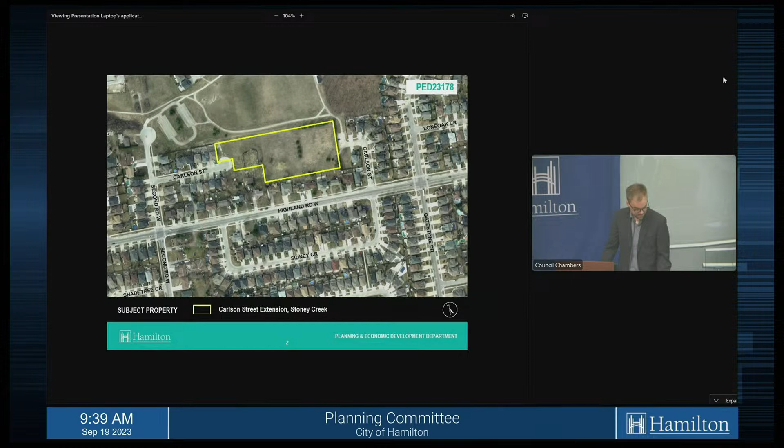The subject lands are designated Neighborhoods on Schedule E1 of the City of Hamilton's Urban Official Plan, and are located within the West Mountain Heritage Green Secondary Plan, which designates the lands Low-Density Residential 2B. This designation allows single-detached, semi-detached, and duplex dwellings at a maximum density of 29 units per net residential hectare. The lands are currently zoned both Neighborhood Development ND Zone, which allows existing uses.

A modified Single Residential R422 zone permits detached dwellings, both of which are under Stoney Creek Zoning Bylaw Number 3692-92. The applicant is proposing to rezone the entire site to a modified Low-Density Residential R1 under City of Hamilton Zoning Bylaw Number 05-200, with several site-specific modifications summarized in Appendix C of staff's report, including a reduction in minimum lot area and reductions to the front, interior, and rear setbacks, all based on the existing modifications in the R4-22 zone.

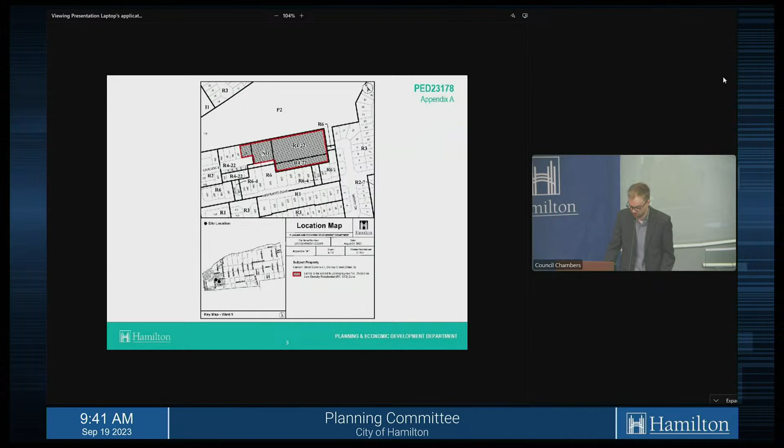Staff are also recommending that street townhouses be removed as a permitted use within the site-specific zoning bylaw, as street townhouses are not allowed in the secondary plan for these lands.

The applicant is also proposing a draft plan of subdivision to extend Carlson Street so it makes a complete connection from east to west. To the north of the proposed extension, the applicant is proposing 14 lots and 2 development blocks for single detached dwellings. To the south of Carlson Street, the applicant is proposing 7 lots for semi-detached dwellings, totaling 14 units to the south.

In order to make this full extension, the road would have to cross this portion of land, currently owned by the city. By extending the road across these lands, it would be severing this property. The proposal is that the lands to the north, currently used as parking for residents to enter Maplewood Park, would have that use maintained, while the lands to the south could be developed for residential purposes.

Through the recommended draft plan of subdivision conditions, staff are recommending that the applicant be responsible for 100% of the costs in the construction of the extension of Carlson Street, including all underground services and sidewalk, as well as requiring the applicant to put a service connection to the city-owned lands to the south.

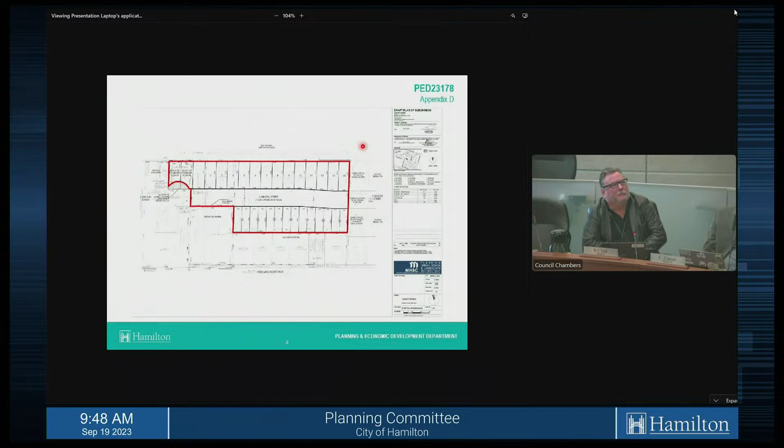Can I ask, Charlie, I can't see the page numbers on this. I'm looking at the one that shows the 7 singles and semi-detached, which is 14 semis. That there, perfect, okay. So the ones to the top of the screen, just to get my bearings, that would be the park? Through the chair, the 14 lots and the 2 blocks would be single detached dwellings, but just beyond that is Maplewood Park here, yes. Thank you very much.

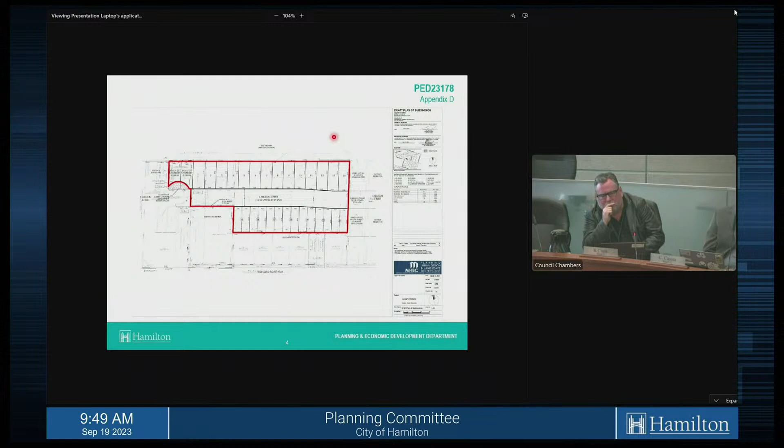And this proposal, if I heard you correctly, you said that it was compliant with the secondary plan and the zoning? Through the chair, the proposal does conform with the secondary plan. However, the zoning is zoned both R422 and neighborhood development, ND, and the neighborhood development zone doesn't allow any new uses. So the applicant did have to submit a zoning bylaw amendment to change the zoning of these lands. But while they also did that, they also updated the R4 zone under the old Stoney Creek zoning bylaw to bring it into 05200, our new zoning bylaw.

Thank you, Chair. And to be clear, what is being proposed here would be classified as low density? Through the chair, that is correct.

In the conditions, it indicates that the developer will be responsible for removing waste until the road is handed over. It didn't address snow clearing. So should we be adding that? The only reason I'm asking is because I've had issues with developments where they're not clearing the snow, the residents think it's the city's responsibility, but we have not assumed the road yet, so we don't do that, and it's on the developer's dime. So can I just get clarification? Will that be the same intent here? And if it is, should we be including it somewhere?

Through the chair, I'd like to direct that question to growth management staff. I've had the same issue, so it's a good question.

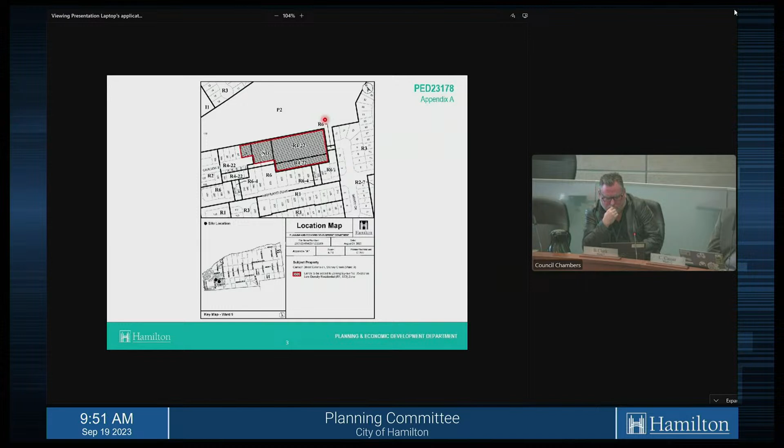Ashraf Hanna, Director of Growth Management and Chief Development Engineer. One of the standard requirements for developments is for the developer to make arrangements through growth management with Public Works to clear snow once they meet the requirements. They need to ensure that the road is ready for snow clearance, and once that's done, there's inspection being done, and then the clearance takes place for Public Works to start snow clearing.

To clarify, Chair, where is that stated? It's part of the construction process. I'm not sure I really understand that process. Staff are just conferring, thank you.

Through you, Mr. Chair, Binu Korah, Director of Development Engineering, to the councillor. As part of the assumption process, the city will actually make sure once the developer completes the construction, and once we accept the road, it is the responsibility of the city to clear the snow, and that arrangement will be made between our assumption section and Public Works.

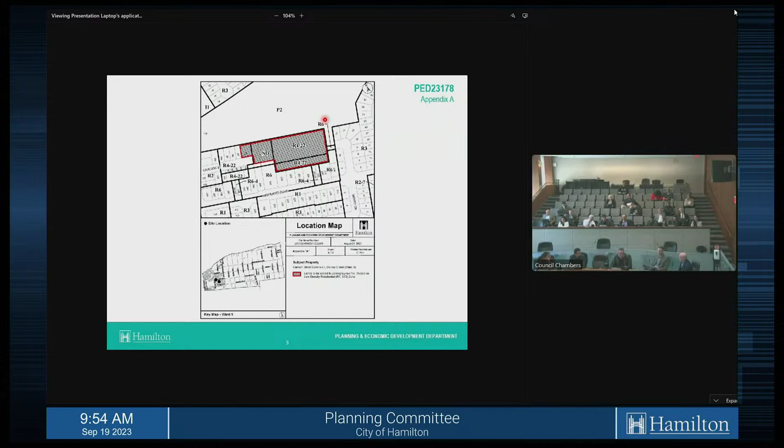I've had some residents raise concerns about the volume of traffic that will be created by these homes. Can you indicate to me, I read in one of the pages that they're not going to have garages in all of the units. Did I read that correctly?

Through the chair, we haven't received detailed building elevations for the final buildings. However, the zoning bylaw — it's our understanding that each unit would have a garage, and that garage would have to be set back 6 meters from the front property line in order to have enough room to park a vehicle. But at this point we have not received individual building drawings for each of the sites.

So each unit, semi-detached as well as single residential, will have a garage, is what you're saying? Through the chair, that would be at the discretion of the builder and the final home buyer. The zoning bylaw does require a minimum of 1 parking space per dwelling, and understanding the area, and that the developer had completed homes on Carlson Street that all had garages, that would be my expectation. Thank you, I appreciate that, Charlie, sincerely.

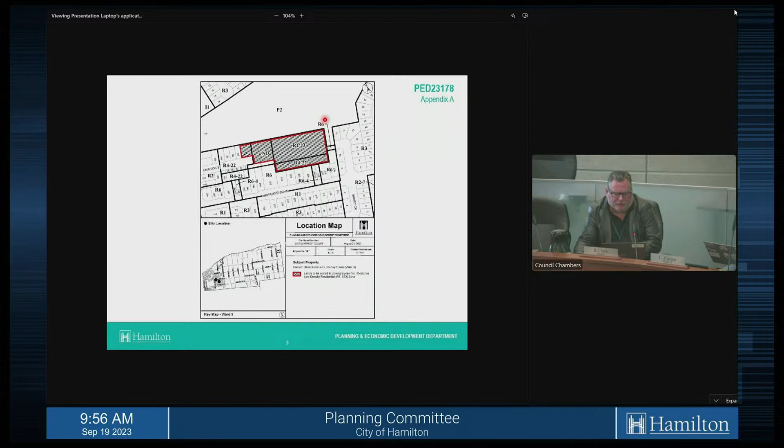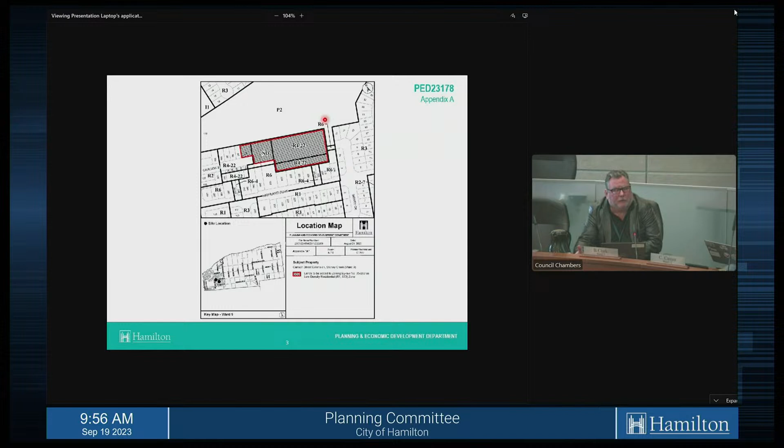The other item pushed back in a petition received today was the volume of traffic going up and down the streets. So we're looking at not a huge increase in housing on that street. So I'm struggling to understand the concern about an increase in traffic.

So you don't have a map there, but Carlson curves up towards Highland Road and then goes straight across to Second Road, which comes back up to Highland. So there are 2 entrances and exits from this development, correct? Through the chair, that is correct.

Thank you. And the other things added in this complaint were issues about drug dealing and things like that occurring in the park. We had that corrected by having a gate installed and closing that park in the evenings, and that resolved that issue completely. Those are all my questions, pending any further questions from my colleagues around the table.

I do appreciate the latitude of asking the questions today. Thank you, Chair. Thank you, Councillor.

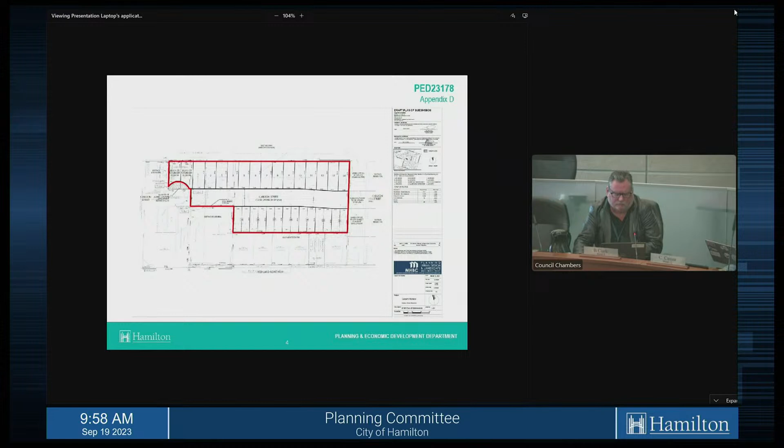Seeing no further speakers on the speakers list, I need a mover and a seconder to receive the staff presentation. Moved by Councillor Wang, seconded by Councillor Francis. All in favor or opposed? Carries unanimously. Thank you. Stephanie Murdich with MHBC Planning is in attendance.

And Stephanie's just making her way to the podium.

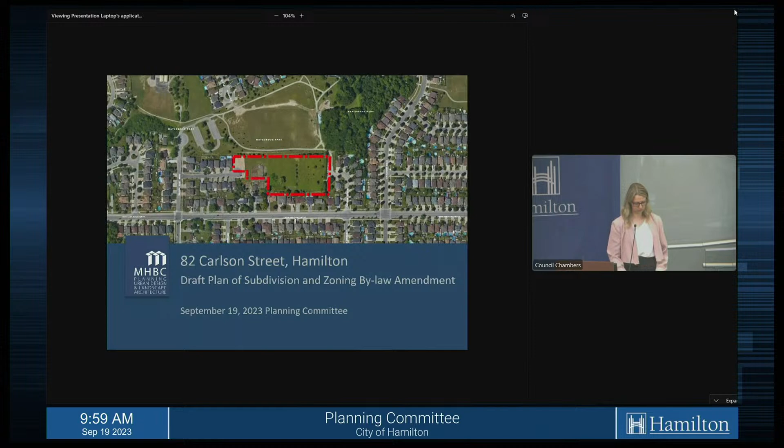Good morning, members of council, members of the public, and staff. My name is Stephanie Murdich, and I'm a planner with MHBC Planning here on behalf of the landowner this morning for the draft plan and zoning application at 82 Carlson Street. Thank you, Charlie, for the detailed presentation. I will be brief and try to clarify some of the questions and items that have come up this morning throughout my presentation.

Overall, the subject lands, as Charlie noted, have 2 points of access, so I just wanted to clarify that — one from the east and one from the west. The proposal includes the extension of Carlson Street as a public road, and I'll have some plans that show that in a moment. The lands are currently vacant and within an established low-rise residential community with a mix of single detached and semi-detached dwellings.

So just some background on the application. The pre-consultation meeting was held in November of 2021, and a formal zoning bylaw amendment and subdivision was submitted in September of 2022. We did have a virtual neighborhood meeting where only one member of the public attended in late 2022, and we received one written comment as part of the application as well. We received feedback from staff and technical agencies, and we prepared a fulsome resubmission, which was submitted in May of 2023.

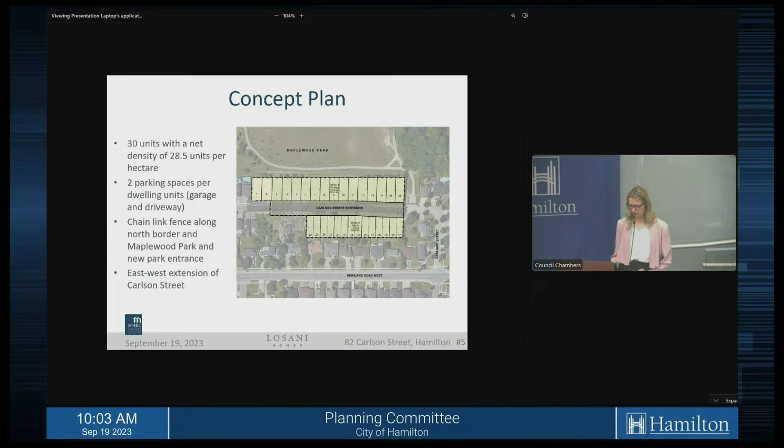So again, this is the draft plan of subdivision. Just a couple points of clarification on this as well. The 2 future development blocks shown on the far west side are currently located adjacent to the existing Carlson Street cul-de-sac, which is proposed to be eventually sold and added to those lands, but that will not happen until Carlson Street is constructed. A public road is proposed as well as a sidewalk on the north side, so that will also ensure the consistency of the pedestrian network in the subdivision.

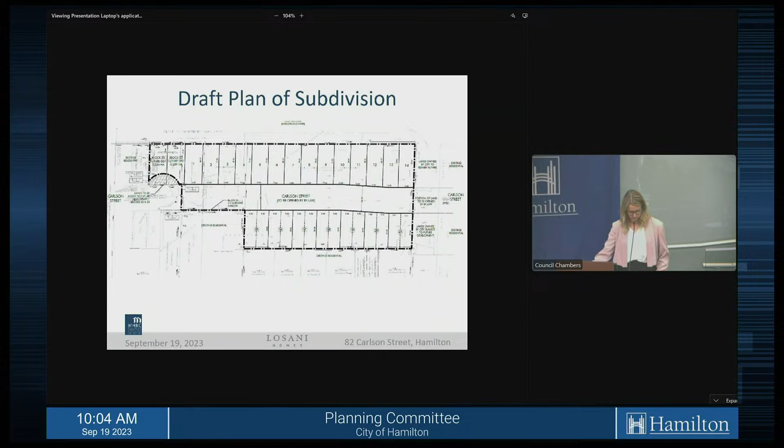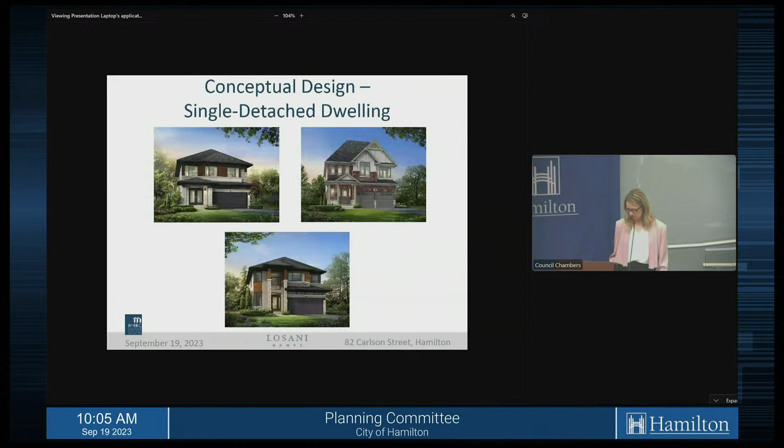So in summary, the proposal is consistent with the provincial policy statement, conforms to the growth plan, and the Urban Hamilton official plan and the secondary plan as well. So staff recommend approval of the zoning bylaw amendment and subdivision, and we support the staff recommendation and the draft plan conditions and zoning bylaw attached in the staff report, and I'm happy to answer any questions.

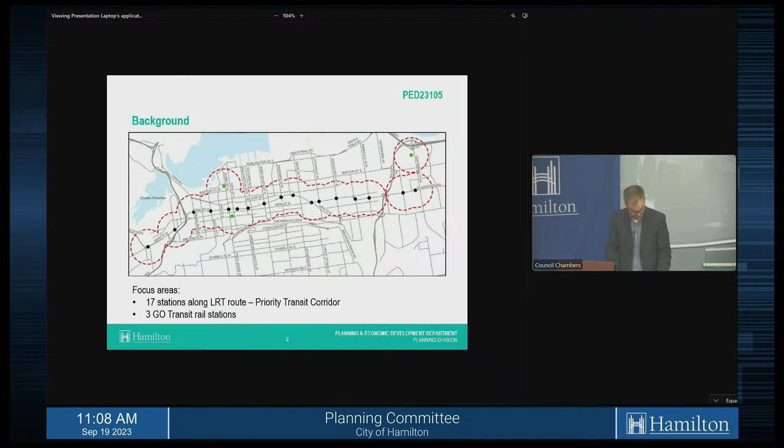The MTSA planning work is a component of the growth-related integrated development strategy update, or GRIDS 2, and the city's municipal comprehensive review work plan. This means that the MTSA work, including any required official plan amendments, would have to be sent to the Minister of Municipal Affairs and Housing for approval.

The city had originally initiated this work back in 2018, and while it was underway in 2019, the announcement from the province that they were retracting funding for the LRT created uncertainty. So staff put this project on hold to focus on other growth-related matters. When the work on the LRT project was reinitiated in 2021, the MTSA policy context had changed through the release of the 2019 growth plan.

So there was a need for staff, in reinitiating this work, to revisit the overall policy framework. Back in 2019 as well, the MTSA work was decoupled from the city's urban growth conformity exercise to 2051, which resulted in official plan amendment 167. However, staff did include basic policies and mapping for MTSAs in OPA 167, including the recognition of MTSAs as a strategic growth area and the urban structure policies, and the identification of the LRT stations to be reviewed.

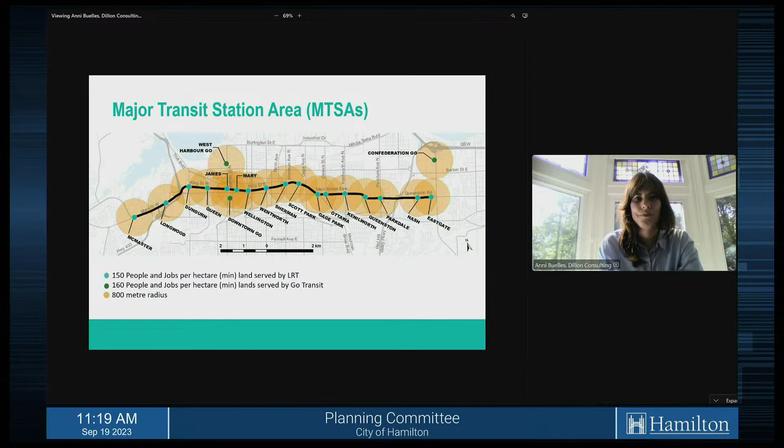I'm going to try to provide a brief overview of our methodology for the work we did and some highlights of the key findings. I'll spend a little bit of time talking about how the boundaries of the MTSAs were delineated and some of the nuances and details of that. But the main question we're trying to resolve through this work is to understand whether the city's current planning framework enables the city to meet those minimum density targets.

So to do that, the first step is to delineate the boundaries of each major transit station area. In doing so, we have to understand within the MTSA what parts of that area can be subject to more significant forms of intensification relative to others within that MTSA. That helps us understand the types of growth planned to occur within that area, which allows us to take all that information and put it into our 3D modeling software, essentially a digital twin model of the city, to begin to understand how much growth is possible within each of these MTSAs.

We also, in step 4, take into account not only the traditional forms of transit-oriented development, but also opportunities for smaller scale intensification within these MTSAs. Those would be things like accessory dwelling units, tiny homes, these types of things that provide diversity in the housing supply. We can then take all that development and translate it into a series of population and employment yields that we can calculate a resulting density from.

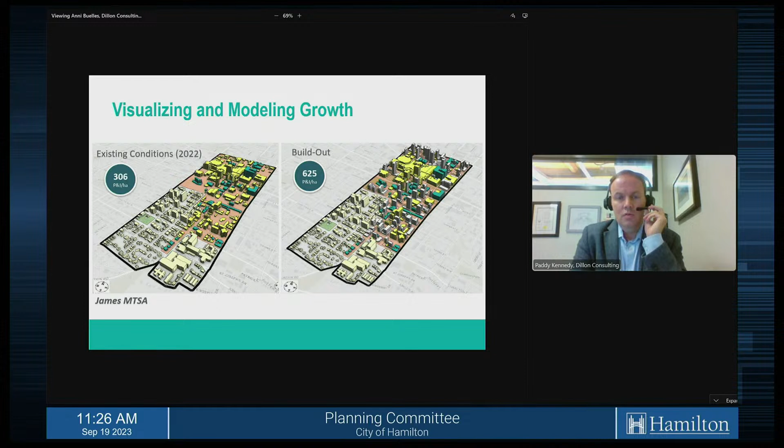Some of the big conclusions thus far are that 14 of the 19 major transit station areas have planning frameworks in place that conceivably allow the city to meet or exceed the minimum density target. There are 5 that could require an alternative target.

We can skip this one since I've covered it already. It's just a snapshot of the rationale for why a station might need an alternative target. If we look at the Gage Park MTSA, there's a couple of things that jump out: over half the MTSA is the park, so that won't accommodate any development potential in the future, and the configuration of the station area makes it a little challenging to plan for more intensification. However, that's the type of information we can bring to the public and work through, and see if there are other changes to the boundaries or our assumptions we need to make.

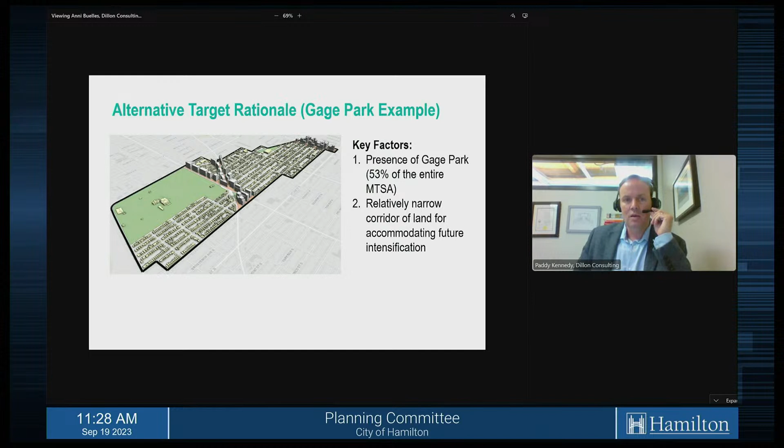So the preliminary recommendations at this point are a couple of things. The first is that for now, we suggest considering all the major transit station areas as PMTSAs under the Planning Act, for two reasons. Until the IZ work proceeds far enough to suggest there are only specific geographies where it's applicable, for now we want to keep all the options on the table in terms of opportunities to implement IZ.

The second point is that the Planning Act framework does allow for quite a bit of greater certainty over future land use by restricting appeal rights in MTSAs once they're designated as protected and have all those elements in your official plan and zoning that Annie was highlighting earlier. So for those reasons, it's prudent to consider all of them at this stage.

The next steps are to update the official plan after public engagement, which would be to prepare an OPA and update the official plan to implement the boundaries and any supporting policies around the framework.

Annie did highlight next steps, and I will briefly mention ours are essentially to complete the public engagement program. I'd note that in 2019, earlier work on the 500-meter major transit station area radius also went through a public engagement process, so we already have quite a bit of feedback, although it's several years old.

We're looking forward to getting back out to the public realm and having those conversations around maps, as well as the online modules we'll be building to get feedback on details of the model and the boundaries of things. And then we'd be in a position to finalize a report and bring it to the planning committee.